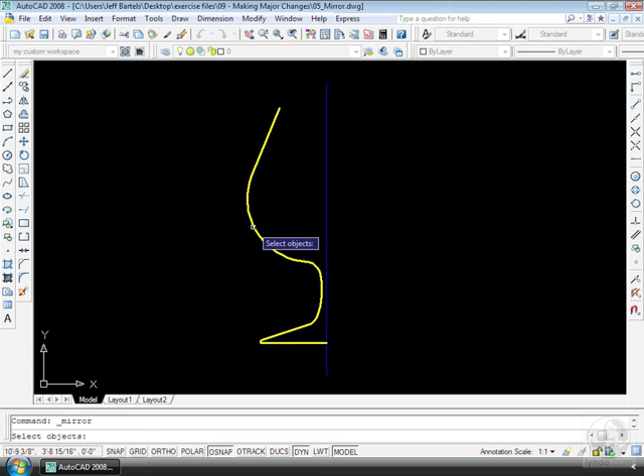Now AutoCAD's asking me to select objects. Which objects would I like to create a reflected copy from? I'm going to click on this entity. This is one continuous polyline. Let me right-click to finish the selection.

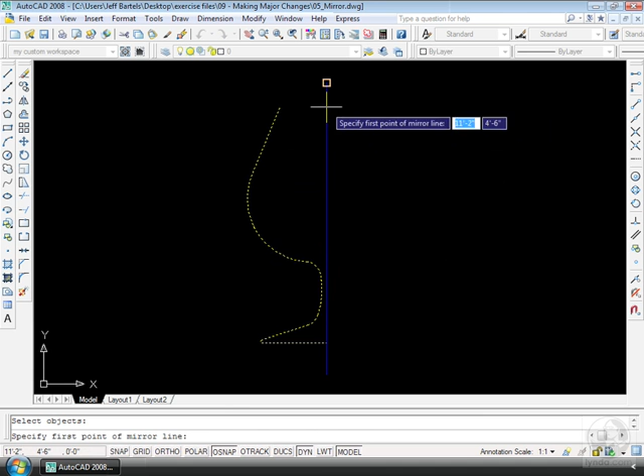Now AutoCAD is asking me to specify points on my mirror line. Pretty much, I just need to give 2 points to identify my line segment that I'm going to use for my mirror. So the first point of my mirror line, I will grab the end point right up here. I happen to be using a running object snap, so I will just click. Then as I come down and grab the other end point, notice I'm creating a mirrored copy. Let me come down and click my remaining end point.

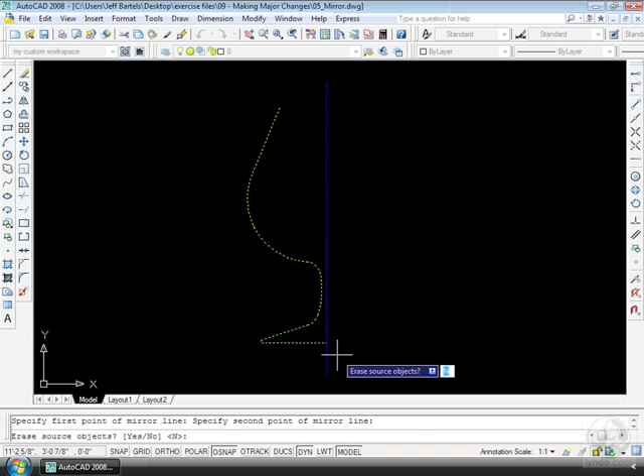When I do, the very last question AutoCAD asks me is do you want to erase the source objects? I don't have to keep the original if I don't want to. In this case, I'm going to select no. I'm just going to hit enter because I want to keep my original geometry. When I hit enter, I have created a mirrored copy of my wine glass.

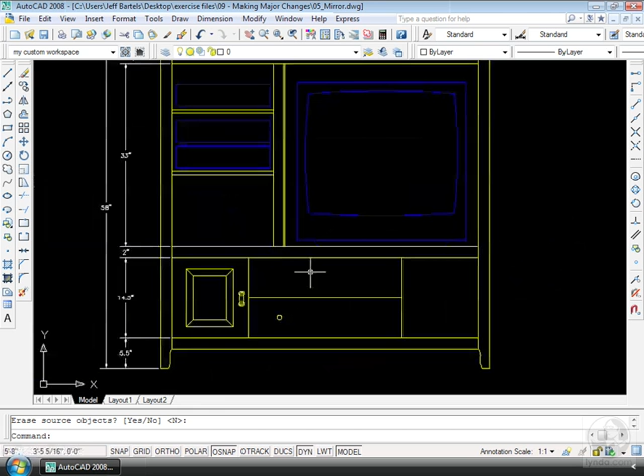Now that we get the idea of how the mirror command works, let's try and use the mirror command in a practical example. I'm going to zoom back just a little bit. We'll pan over. Let me center my entertainment center on screen. I'm going to tweak this back one more time.

Let's assume I'm a furniture designer and I'm working on an entertainment center. Now, I've already finished the raised panel door on the left side, and I don't want to go to the hassle of drafting another door on the right side. Since this geometry is symmetrical, I am going to create a mirrored copy of my left door to create my right door. Let's try that.

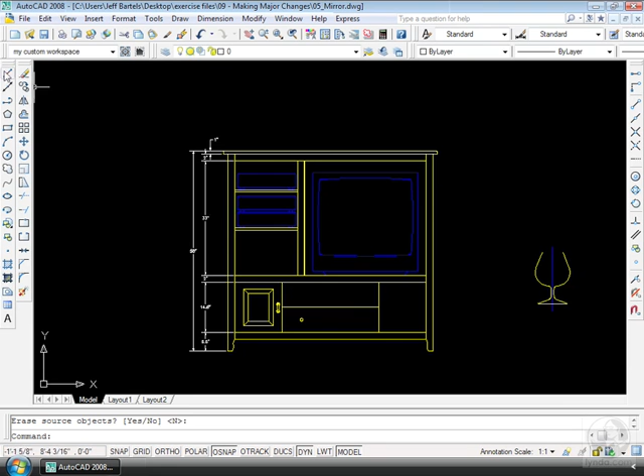Before I launch the mirror command, I'm going to create a line segment that represents my mirror line. I'm going to come over and launch the line command. AutoCAD says specify first point. I'm going to use a midpoint object snap. So I'm going to come over and click my midpoint object snap, and then I will click at the top of my entertainment center.

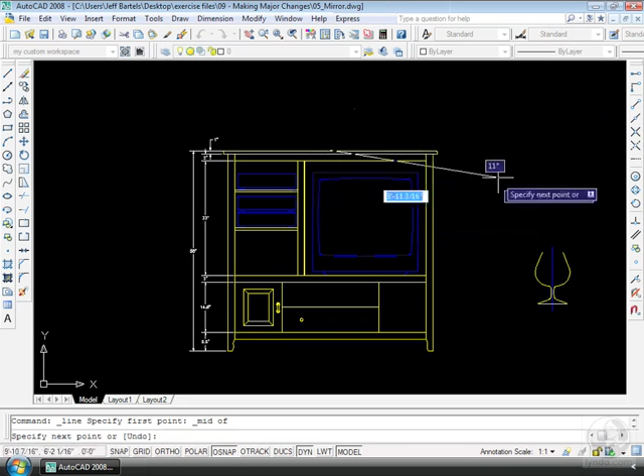Since I'm creating a mirror line, I want to bring this guy straight down. I'm going to use another midpoint object snap. I'll grab midpoint, and grab the bottom of my entertainment center. I'll just click, and when I'm done with the command, I'll hit escape. This is the line I'm going to use to create my mirrored copy.

All right, let's launch the mirror command. I'm going to come over to my Modify toolbar and select Mirror. AutoCAD asks me to select objects. I'm going to start clicking on these. Well, it seems like they're a bunch of disjointed pieces, so let's do it with a window.

Since AutoCAD is saying select objects, I'm going to click just above my panel, and pull to the right and create a nice window selection. Let me click to finish the window, and then I'll right-click to let AutoCAD know I'm done selecting objects.

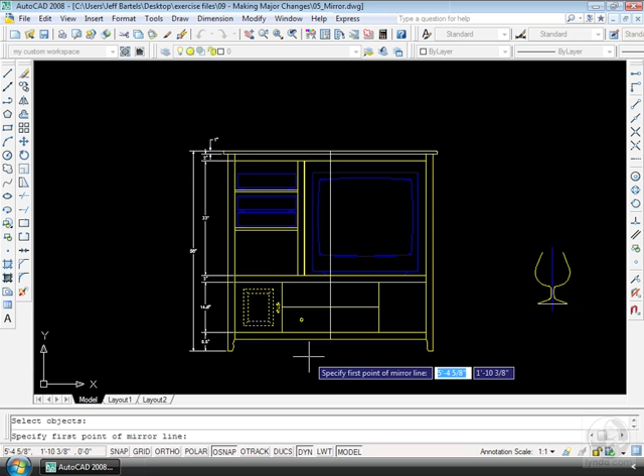Now AutoCAD's asking me to specify the points on my mirror line. Perfect, I'll grab the endpoint right here, click, and then come up and grab the endpoint right here. Notice I don't have to be all the way on the endpoint to select it. Let me left-click, and do I want to erase the source objects? No, I'm going to hit enter to finish the command.

Now here's the dirty little secret. I don't have to have a physical line to do my mirror. Let me erase this guy. I'm going to use the erase command. I'll come over and click erase, and then click this line and right-click to finish the selection.

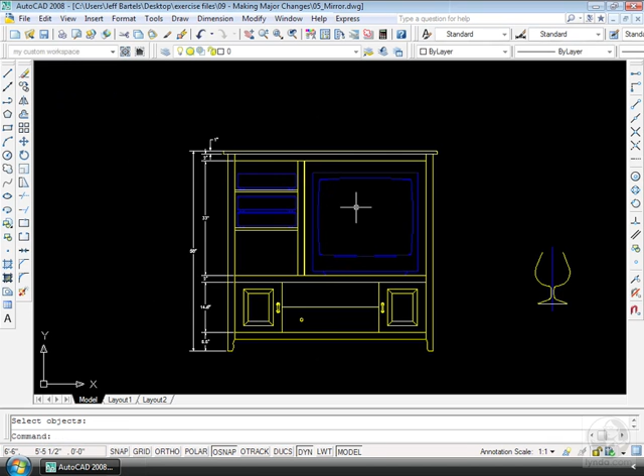Let me zoom in on my drawer handle. I would like to create a mirrored copy of my handle on the left. I would like to produce a copy of this guy on the right. Let's do that by using the mirror command, but this time we're not going to create a physical line.

I'm going to come over and launch the mirror command. Let me click the mirror icon. AutoCAD asks me to select objects. I will select this one and then right-click.

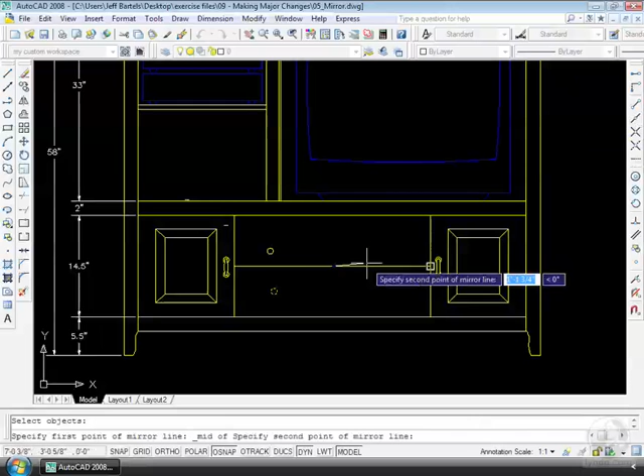All right, AutoCAD's asking me to specify the first point of my mirror line. I'm just going to use an object snap. Let's use midpoint again. I'm going to come up and grab my midpoint object snap, and then come down and grab the midpoint of this line. And then let's grab the other point. I'm going to select the midpoint again, and come down and grab the midpoint of the bottom.

Didn't need an entity, I had the object snaps. Erase source objects? No, I'll go ahead and hit enter. And I have just mirrored my drawer handles.

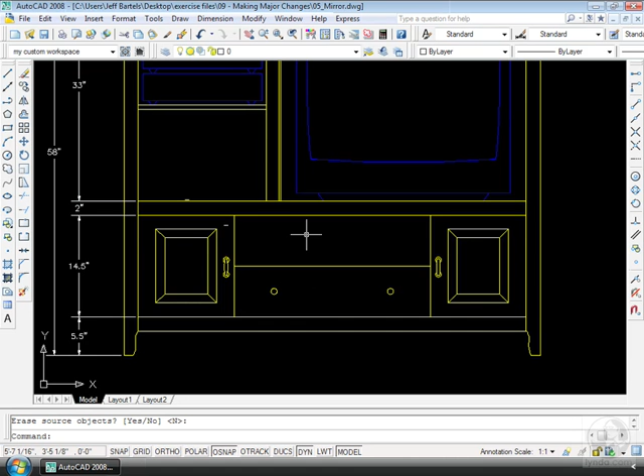Let's do one more. I would like these handles to be on the upper drawer. I'm going to launch the mirror command one more time. Let's get it from the right click. I'm going to right click and select repeat mirror.

Select objects. Let's click and make a window around both of these handles. I'll click to finish the window, and then right click to finish the selection. Now I can specify my points on my mirror line.

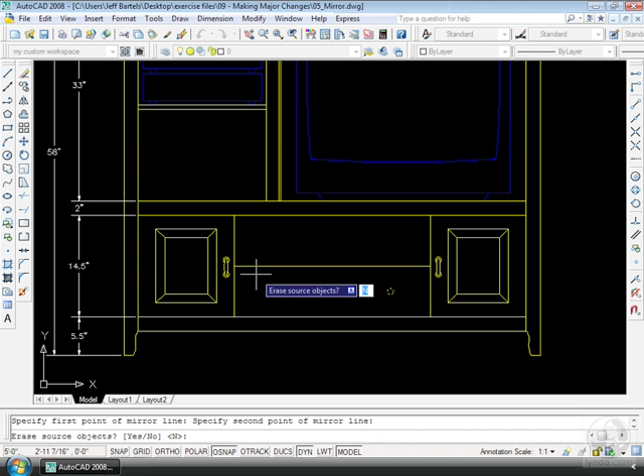I have a running object snap set for endpoint. So I'm going to move up and click the endpoint here, and then move over and click the endpoint here. When I'm done, do I want to erase source objects? No, I'll go ahead and hit enter, and the drawers are finished.

Remember that every time you're working with symmetrical geometry, you have an opportunity to use the mirror command. And if you use it properly, you'll be making AutoCAD do half of your work.